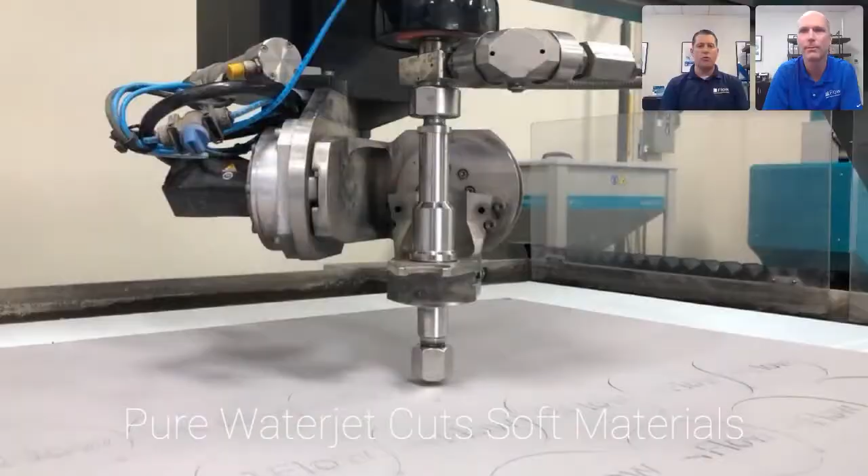We have a quick video here showcasing what's called a pure water jet - not using any additives, aggregate, or abrasive in the mixture, but just that pure water jet stream to do soft material cutting. This would be for something like foam, a gasket, or even a soft plastic.

There's a lot of good applications for pure water cutting, like Adam just said, from gaskets to foam, insulation, food - that's a very popular and great application for pure water cutting. That's very different. Yeah, very.

I even got it so you can see what they're actually cutting here - again, a very soft material. The general rule of thumb is, if you can cut it with a razor blade or a knife, you can cut it water-only with the water jet system.

Then there's the other alternative, using what's called abrasive in the mixture, which we'll be showcasing next on the machine. Let me advance the slide here. So Adam, you want to explain? When we entrain the abrasive, it's a whole different game.

In the early 80s, we developed what's called abrasive jet cutting. This uses garnet sand typically, taking that super high velocity of water but now entraining that garnet sand in the cutting process. This opens up the doors for a ton of other applications for water jets, getting into harder materials like metals, stone, and glass cutting - that's where you'd use that garnet sand or abrasive jet, as we often call it. We're really converting that pressure into velocity of that stream as it's traveling through.

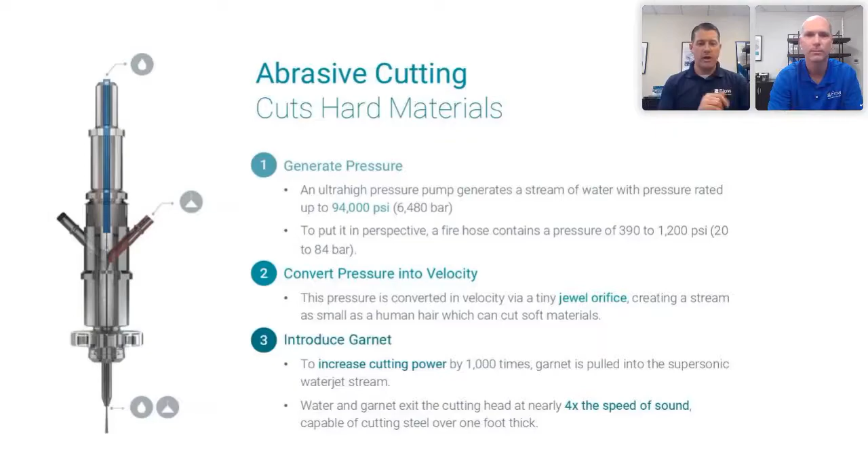As we jump ahead here, we have a quick video to showcase what an abrasive jet setup is - you'll see it cutting through some carbon fiber material here. I think this is a chassis, right Adam, that was made by Fireball? Yeah, this was coming out of carbon fiber they had used with that abrasive jet.

That moment you're seeing on the screen is actually the piercing process for that part through the steps. This is a chassis on a little drone that they developed with our customer over in Spokane, Washington - Fireball Tool. And I think I see a question here - that's actually a really good question.

I think we're going to get into some of that, but specifically hard materials - what's available? The answer is kind of anything with the water jet, including some of your titaniums, Inconels, and QT100 are great applications for water jets. You can see that white line coming out the bottom of that nozzle, and that's just slicing this material up - this material obviously cuts very quickly.

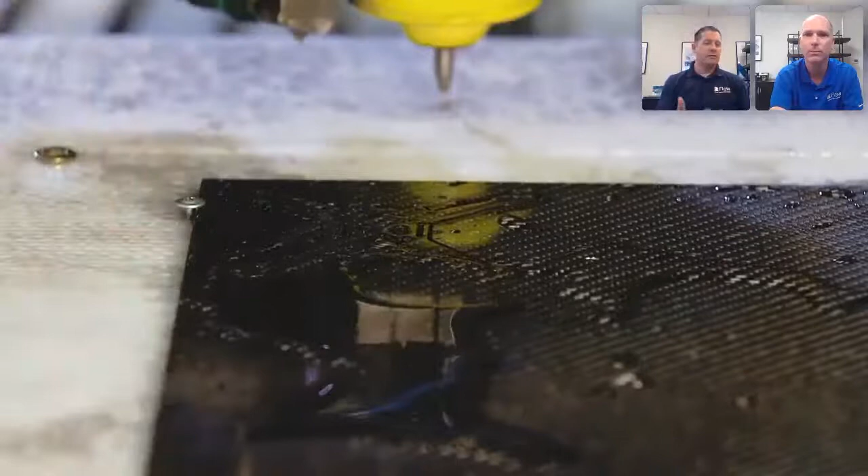As Howard just said, what's the hardest material? Like Adam said, everything will erode - it's a matter of how fast we can cut it, but you can cut any material type. We'll get into the software, but typically you're going to program out that shape right on the jet and be able to process it and come right off the system as you're seeing - no secondary processing typically.

We'll jump ahead here. Here's a good question from Jeff - is aluminum oxide the only medium that our machines will typically use for cutting? And is that typically a one-time use, or can you use it again? The short answer is that aluminum oxide, although it can be used with the water jet, is very uncommon, just because it's a very expensive material.

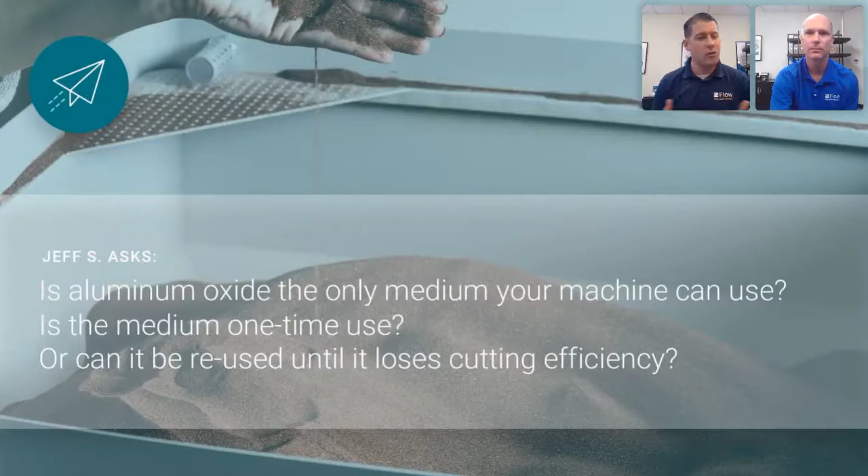It erodes the material very fast, but it costs a lot to buy. More often we see garnet sand being used as that abrasive in the cutting process, because it's a very affordable, readily available material. Regarding if it's multiple use or single use - it's typically single use, because a lot of that abrasive will be pulverized during the cutting process. There's a very minimal amount that could be recovered, so it's not generally economical to go through that process of reusing it.

I think a question for the audience is what type of materials are you guys going to be cutting? We're going to have a poll show up on your screen to get a good gauge of everybody in the audience. What are you using? What type of materials would you be cutting? Love to get the feedback from the audience. I'm looking at the results as you guys are clicking - just take a second, click on those different material types.

Somebody's clicked steel already, somebody's doing stone material, some aluminum. Just want to get a feel for what you all are doing. It looks like a little bit of everything, I guess. It's interesting - foam, rubber, and gasket, haven't seen an answer for that one yet. That's a pure water jet application. These others are all abrasive jet applications. It's kind of interesting to see the percentages here.

Finish up the poll if it's still on your screen, we'll keep going as you're doing that. This slide is basically just a picture of all these different random materials, and that's really the key to water jet - it will cut everything. So you see glass shown there, and foam and stone, composites, steel and alloys. Aluminums are obviously popular. I'd say the bulk of water jet users in the marketplace are cutting metals, but glass and composites and stone and foam are also wonderful applications for an abrasive jet.

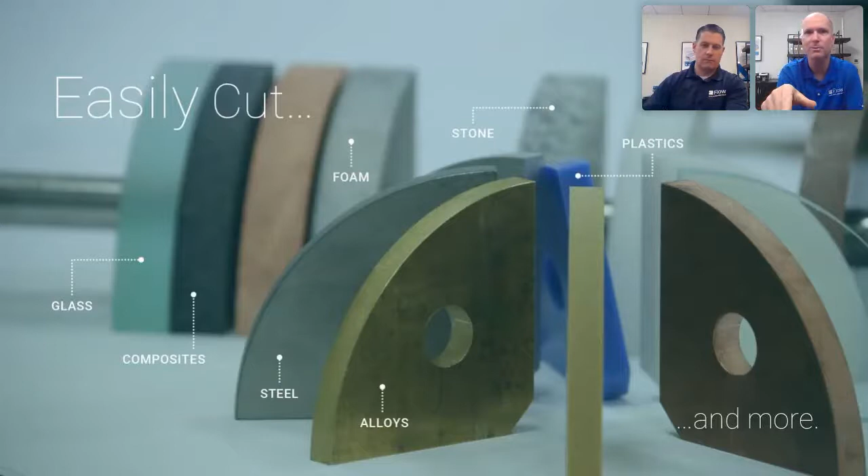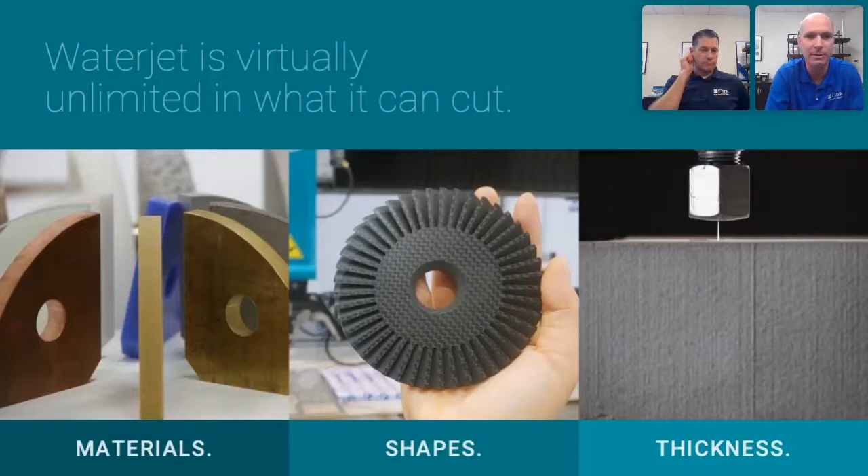A general rule of thumb, back to what Howard asked about hardest material - the harder something is to process or machine or cut traditionally, the better that application becomes for an abrasive water jet, because it's simply an erosion process. It's all speed related. In addition to versatility with different material types, you see in the middle there a very intricate shape, some sort of blade shape that was cut with 5-axis water jet. So very intricate shapes can be created with water jet. And then ultra thick materials can be cut - we'll show you a crazy picture of a 24-inch thick piece of steel later. But again, it's erosion, it's speed related. The question becomes how fast and efficiently can you cut it, not can you cut it. So that's the difference there.

Here's another question we wanted to cover for the group - keep them coming on the live chat line, because we want to jump to those too, if you guys have better or more interesting ones. But the second one we hear all the time: how does your water jet compare to a laser, to a plasma, to an EDM? So we wanted to touch on that really quickly.

We'll run through a few slides, and before we do, there should be another poll popping up on your screen. We want to know what type of equipment you guys are currently using in your shop. I'm going to take a look at the poll as you guys answer. I see CNC, laser, plasma, and obviously EDM - there's more cutting processes than we have listed there. I see a bunch of you have water jets. It's interesting, a couple EDMs. I think this is pretty representative of what we hear in interactions with our customers - most customers kind of have a little bit of everything already. That's interesting to see those poll results.

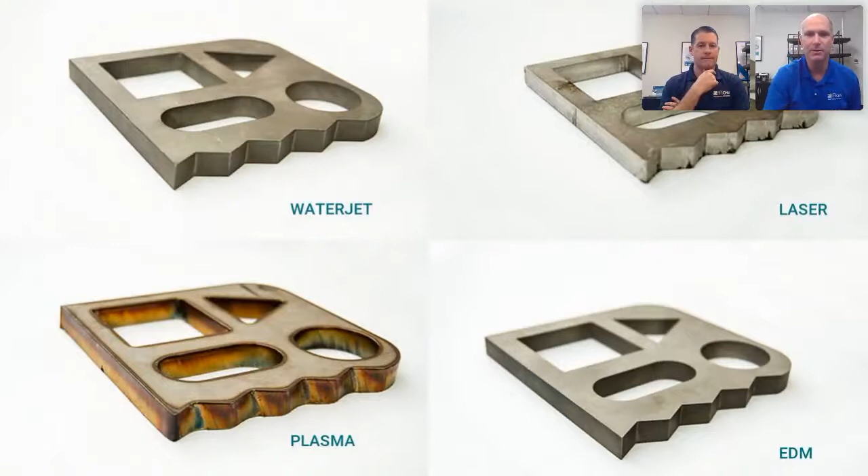Okay, so let's compare the 4 different processes. This is just a snapshot of the same shape, cut by the 4 different processes. On the top left is the water jet - we'll look at that in more detail. On the top right, you can kind of see the laser edge - just visually you see a little bit of heat affected zone there, you can see where it pierced in certain areas, so there is a heat affected area of that cut. On an EDM on the bottom right, obviously very high tolerance, high accurate wire cut part.

And then on the bottom left, you see by far the most heat affected area, and probably potentially the fastest cut here, but maybe not the most accurate cut of the four processes.

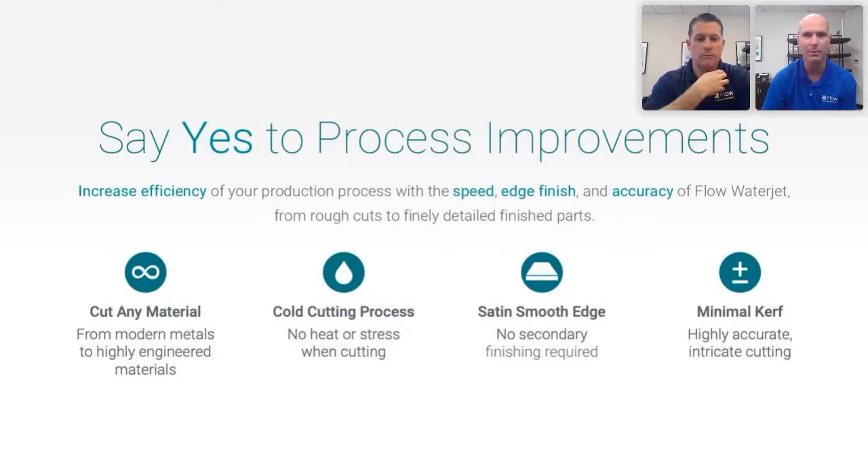So there's really four major process improvements you can experience from water jet. Cutting any material, we've talked about. It's a cold cutting process, so we're not introducing heat or stress to whatever's being cut. There's a very satin smooth edge, and it's rare that you'd need a secondary finish on the water jet cut edge. Obviously if you're going to machine a feature or bend the part, that's different, but I'm talking about the actual finished edge quality. And then there's minimal kerf, which allows you to cut very intricate parts, but it can also greatly reduce material cost if you're cutting expensive alloys or composite materials where you want to maximize sheet utilization.

So here's the quick close-up of the water jet part. Adam, you want to take them through?

Yeah, absolutely. This is a really cool picture for a lot of our customers. It's just a zoomed-in photo of a stainless steel part cut on one of our water jets. As Brian mentioned, we're not imparting any heat because it's really just an erosion process, so you don't get those heat affected zones or hardening of the edge.

As a result, we generally get a really smooth finish, which ranges from an 80 to 125 RA finish. You can dictate that, go to a faster edge quality with our parts and our software, but typically you see a very smooth finish on a part.

And as Brian alluded to, for most operations you typically don't need some sort of cleanup or secondary operation, where you get a finished part coming right off the water jet that you could use in your fabrication purpose.

Real quick, Adam. Phil, another good question there - appreciate you chiming in, keep those questions coming. But can you cut hard and soft materials on the same water jet? It's a really good question.

Yeah, and the answer is absolutely yes. There's some things you've got to do to protect the surface of the materials or the bottom of the materials, depending on exactly what you're cutting, or to keep things as dry as possible. But the answer is absolutely yes, you can cut abrasive jet and water jet on the same machines often.

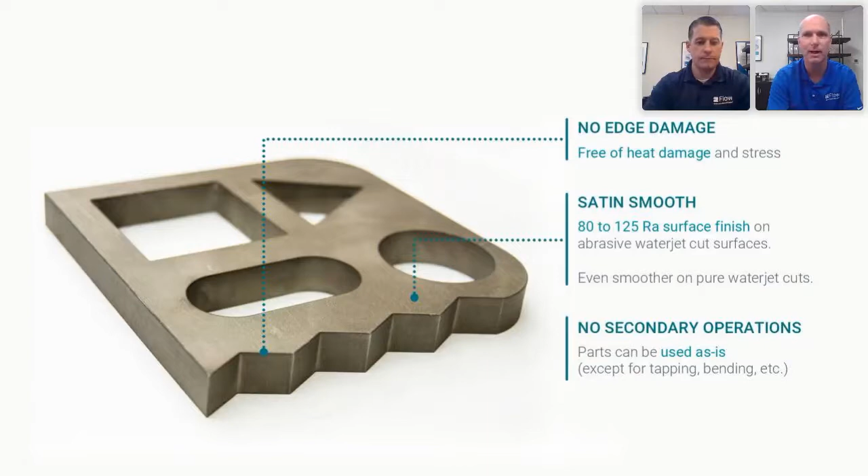And one thing along those lines, maybe to Phil's question - going from even a hard material where you have an abrasive jet, like if you're cutting mild steel, and then jumping to an aluminum or even a carbon fiber, is there any tooling changing that's required for that?

With our setup for our water jets, all you need to do is simply select in our software what the material type and thickness is. So you don't have to change the flow rates of garnet, the pressure of the jet or the pump - that's all controlled right at our operator station.

So to summarize this question about comparing waterjet to these other processes, we typically think of those other processes as complementary. Honestly, they're really not a competitive process as much as a complementary process. Like Adam said, some of the most efficient shops we've ever seen obviously have multiple processes that are really good at individual things. The cool thing about a waterjet is it's kind of good at all of them. It can be a very good entry into a lot of other markets to help you explore other business opportunities. And then maybe you get some crazy high volumes and one of those other processes helps you be as efficient as possible - if that makes sense.

One thing to highlight with the waterjet though - I think one of the big benefits for a lot of people in the fabrication world is, although there are some great technologies with lasers, EDMs, and high-def plasmas, those are very focused machine tools where they're very good at a select bandwidth of materials or products they might be cutting. Whereas a water jet, we're good at everything in some ways - no matter what you put underneath that cutting head, we'd be able to cut it and process your parts.

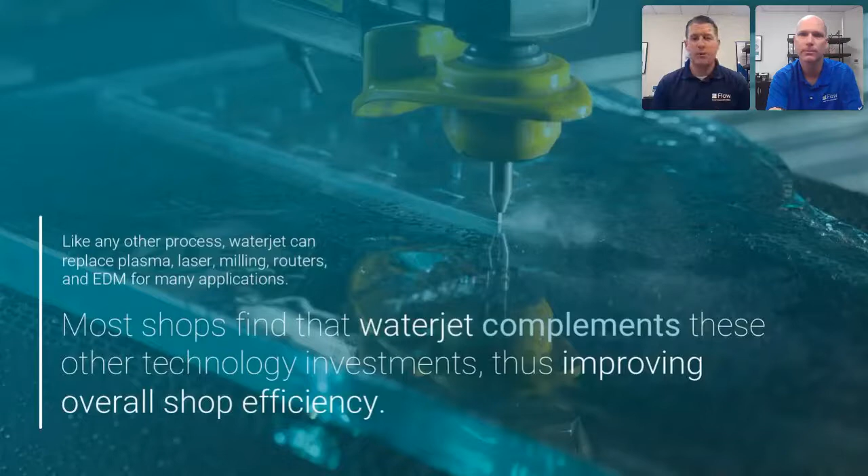Oh, here - so it sounds like somebody logged in earlier, Donald.

The question regarding stacking material.

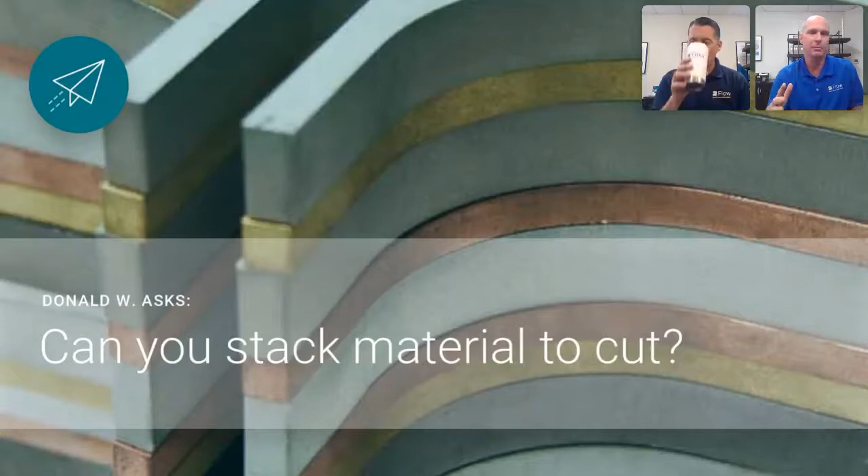This is very unique to water jet technology: yes, you can stack material with a water jet. You can not only put multiple layers of the same material, you can also put different materials and cut it all at the same time. The picture in the background shows stacking several layers thick of a material in process. You often see this in sheet metal applications where you're cutting a high volume of the same geometry out of a thin gauge material. It makes all the sense in the world to stack that up to get more efficiency out of the jet.

I'll jump in here, but the third question we heard pretty frequently is, how do I know what the right water pressure is for my business and application and what you're doing? Frankly, that's really what we're here for, to help, because there is no magic solution. We do build a variety of different pump styles, pump pressures, and pump horsepowers to really dictate what the right fit might be for your budget, your application, and your production needs.

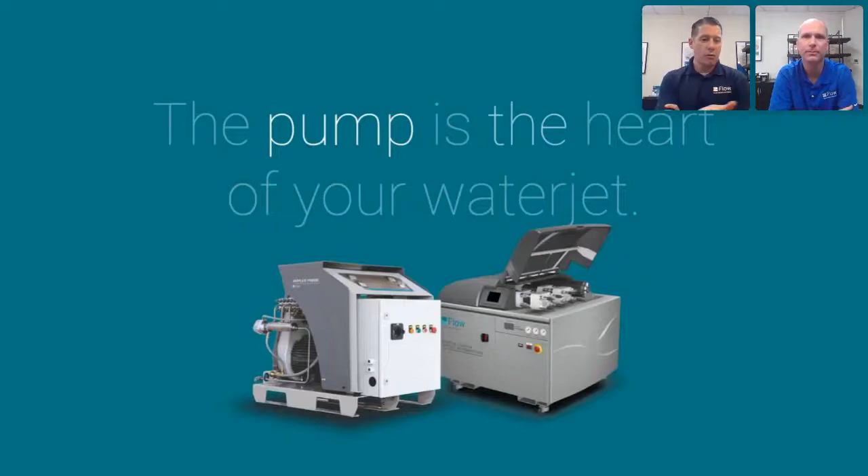But it goes to the core that the pump is really just that, the heart of a water jet system. It's what's creating that high pressure water, creating that velocity of the stream, really done right at the pump technology, which is shown here with a couple of the different pump models you might see.

What you often hear in the water jet industry, in the water jet world, is that there's two distinct ways to create that high pressure water. There's what's called direct drive or rotary style of a pump, and then there's what's called an intensifier style pump. Both will produce high pressure water, and both are great for the water jet world. It's just a matter of each customer's needs and applications dictating where you might fall within there.

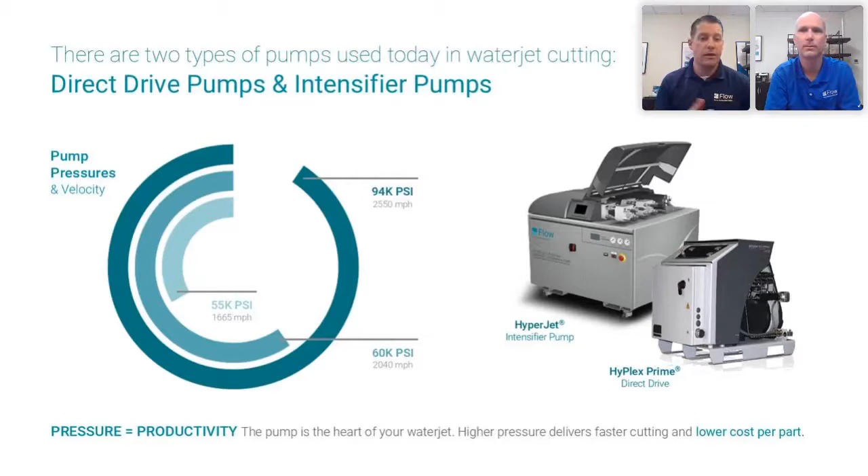As we jump to showcasing a little bit of a spectrum of our entire line of different pumps that are available, these can be equipped with multiple different machines and platforms. You have the HyPlex Prime, which is in that 55,000 to 60,000 PSI range. Then you have the industry standard, what's been around for a long time, called the 60K Intensifier Pump. This will produce 60,000 PSI water right at the cutting head.

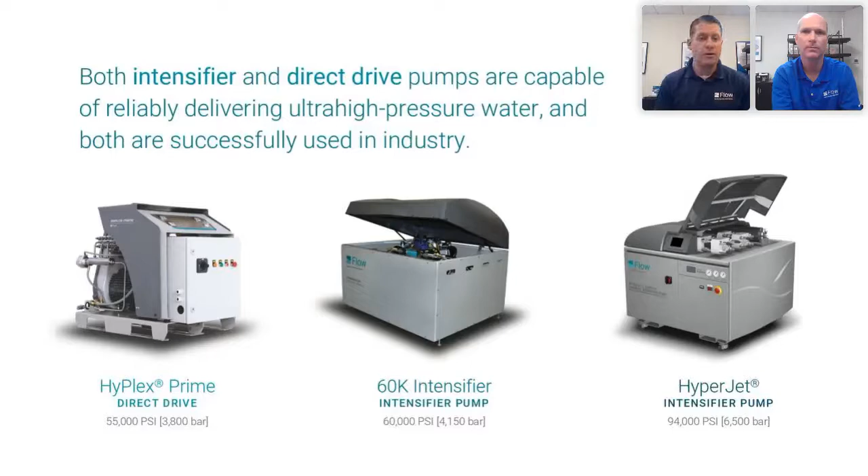The next evolution to that was what's called Hyperjet technology. This delivers up to 94,000 PSI of pressure at the cutting head using that Hyperjet technology. We'll jump specifically into a few of these to showcase how these pumps actually work and create that high pressure water.

I'll jump in here, Adam, if you want. Adam is talking about direct drive and intensifier, two very different mechanical systems that will produce high pressure water. We want to get into the details of that. Let's start with the direct drive.

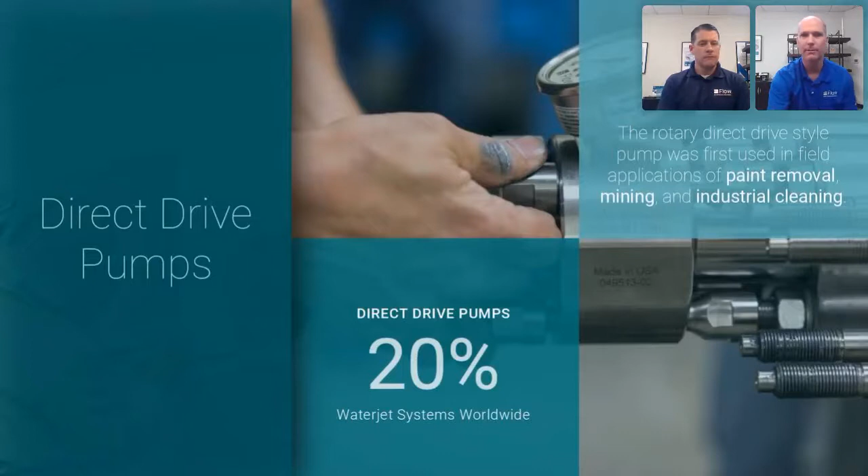A direct drive pump, and you're going to see the mechanics of this, is a rotary style pump. It uses a crankshaft to push three pistons through three cylinders, and you'll see that video in a second. It makes up about 20% of the total global market share of water jet users. The direct drive technology was originally invented because it actually outputs a lot of volume of water per horsepower of motor, and it's really good for surface preparation, paint removal, mining, and industrial cleaning. We use that today a lot in those applications.

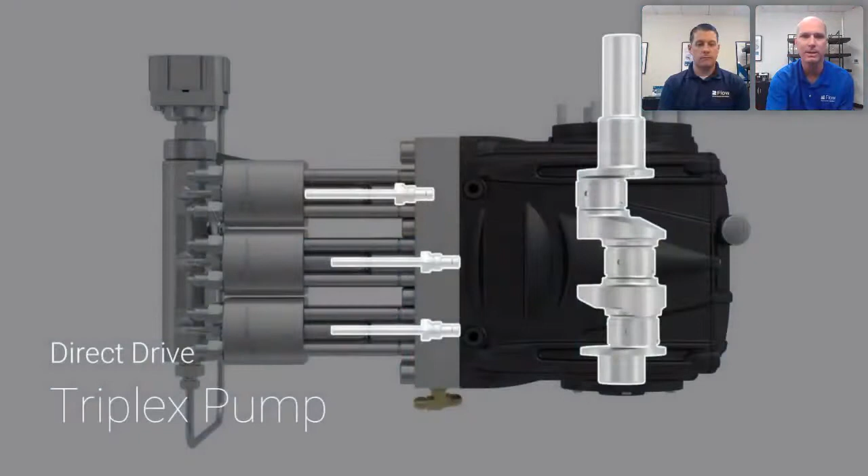Let's look at the details of it. Here's a good visual from a top-down view of this direct drive, also known as a triplex, because there are three cylinders. You see the cam on the right-hand side, which is going to push those three little ceramic pistons. There's a video of this right here, so let's let this video play.

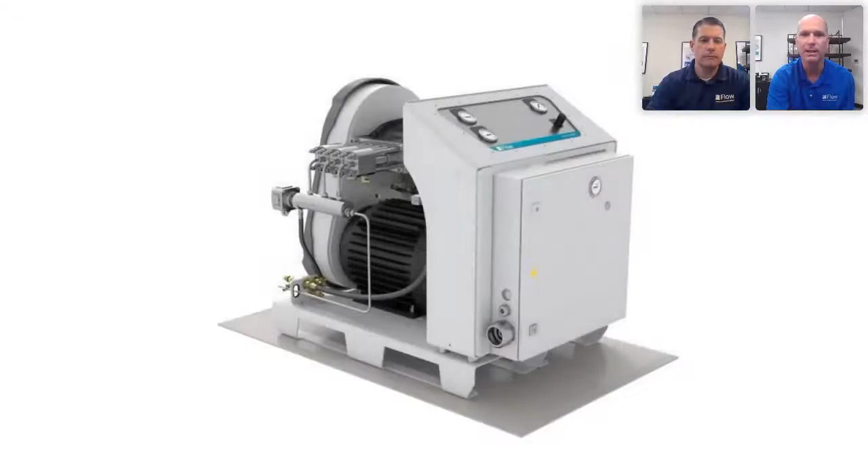Pretty cool rendering for you guys to see a cutaway of what this really looks like internally at the pump. You'll see that cam rotating.

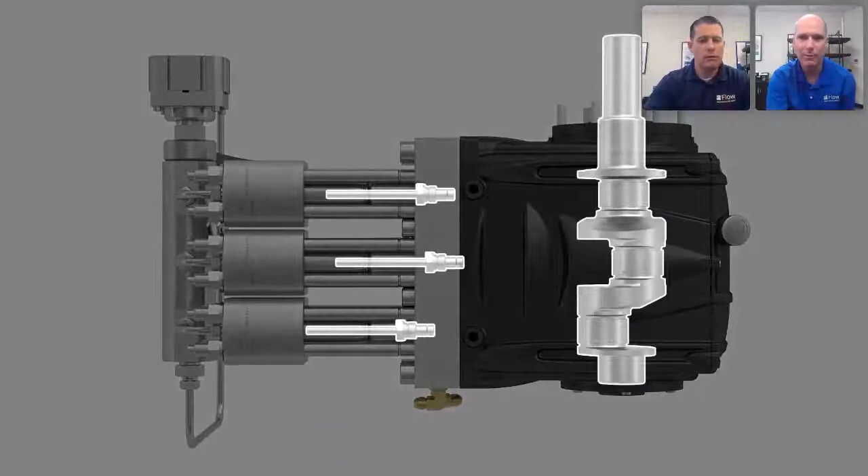Now this is obviously in slow motion here. This is usually 800 to 1500 RPMs, kind of depending on different variables, but that's pushing high pressure water out, and then on the backstroke, it's pulling low pressure water in. There's the check valve there, kind of a close up view of that.

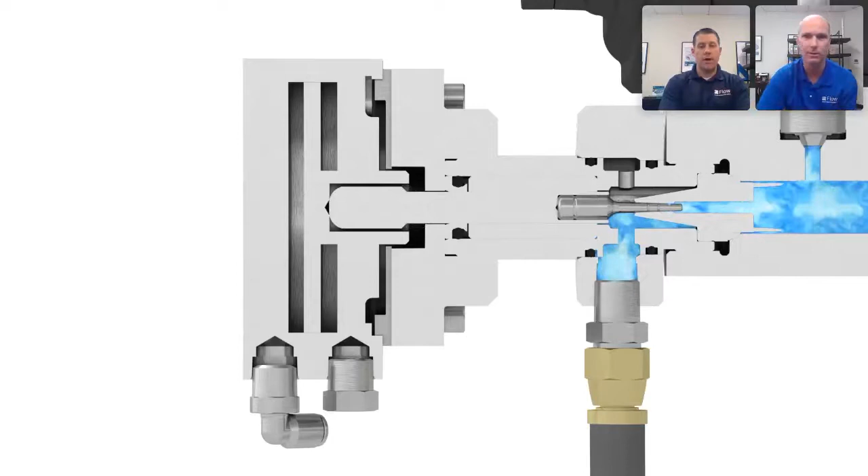Really cool pump. This is a pressure control valve system that'll allow any water that's not going to the cutting head to bypass automatically. And again, where that name comes from, it's a directly coupled electric motor to the cam or the crankshaft on there, so you get that very energy efficient design of a machine.

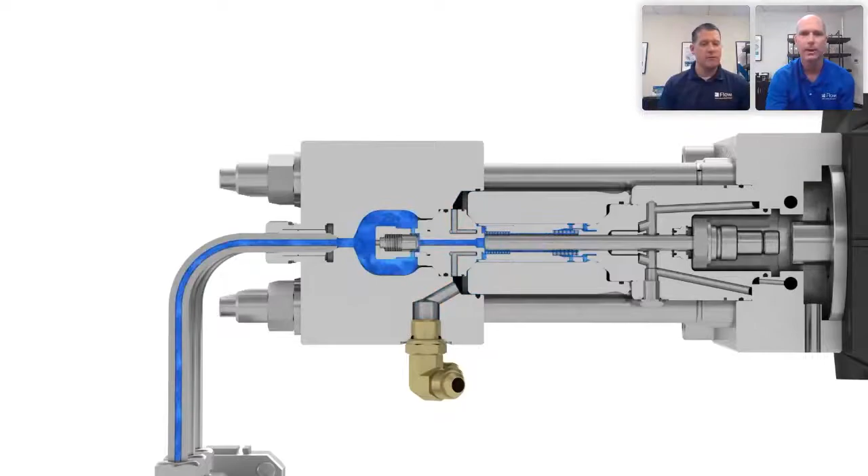And we can even jump to some of the main benefits that the technology offers. This thing is still looping here. We'll summarize this for you.

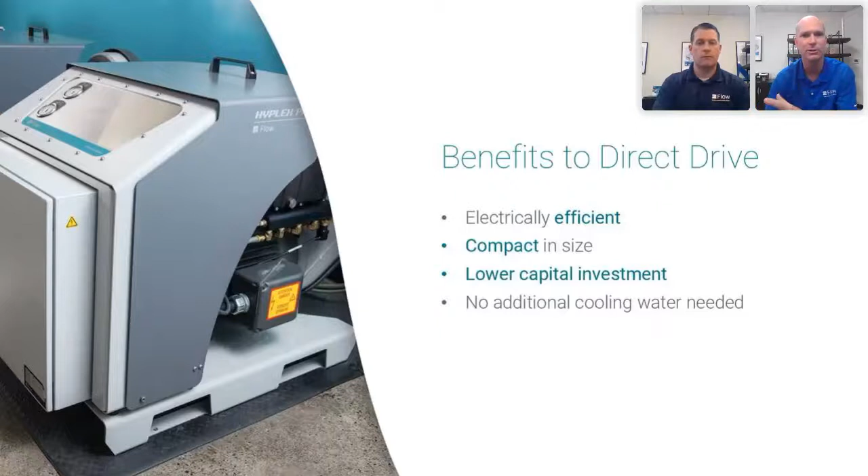So the benefits of a direct drive: they're extremely electrically efficient, I alluded to that earlier, where they output a lot of volume of water for the horsepower of the motor itself, so that's a benefit in some instances. Compact in size, so if your size constraint is an issue, that's a benefit. Lower capital investment for sure versus the intensifier, which we're going to look at next. And then we make our direct drive with no additional cooling water needed. That's all part of a closed loop unit inside the HyPlex itself.

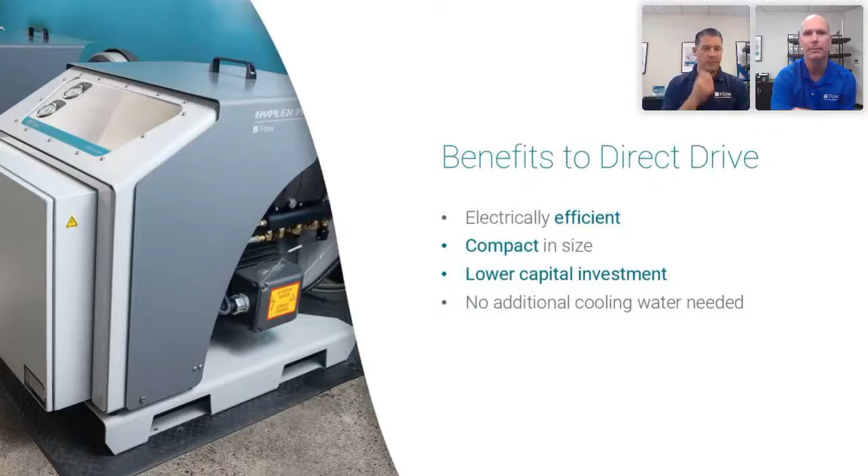Yeah, very energy efficient, and this is just that pump technology that everybody kind of sees up close, what that frame looks like. It does have a cover package on it, but this HyPlex Prime is what we call our direct drive. Typically well suited for our machines, which would be like our Mach 100 and 200 systems. Very cost effective, great technology, kind of an ideal fit for those type of machines.

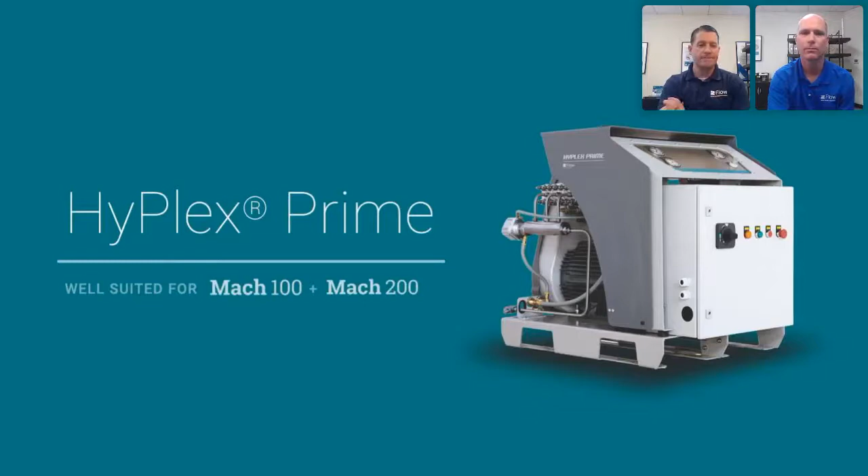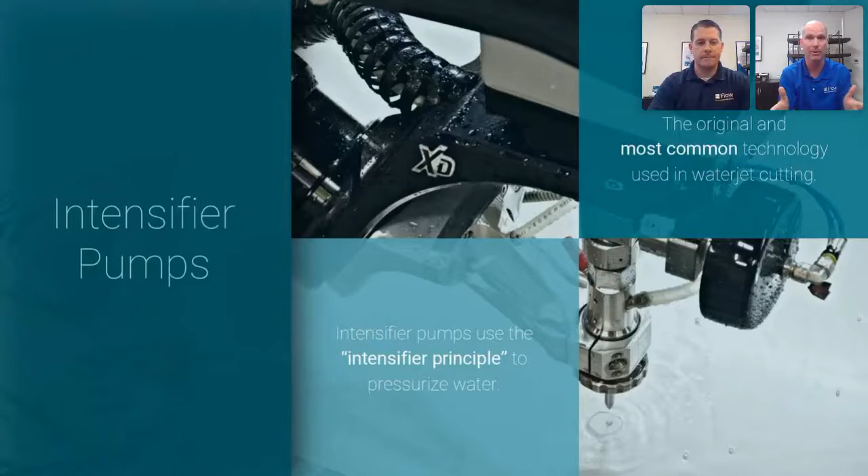So let's now shift gears over to the intensifier style pump. Adam can walk you through this a little bit, but I'll tell you, this is the most common technology. It's been around for a long time, and it's an intensification principle. So you're going to see a hydraulic system instead of a rotary system, a linear pump versus a rotary style pump. Let's take a look at it.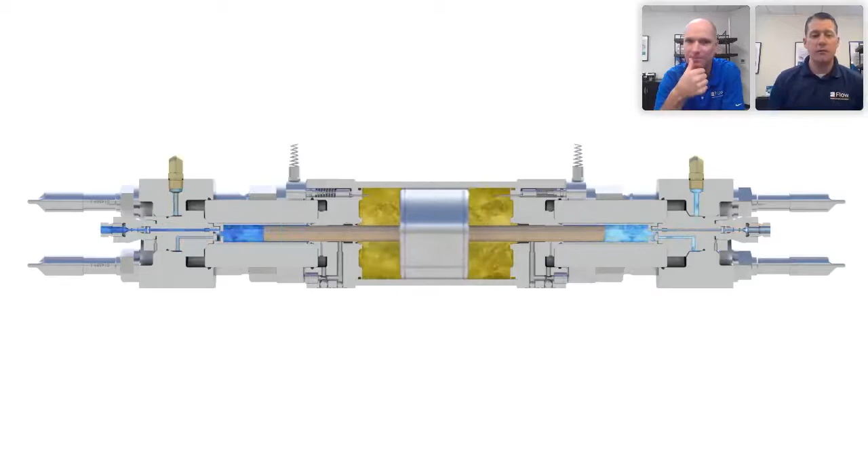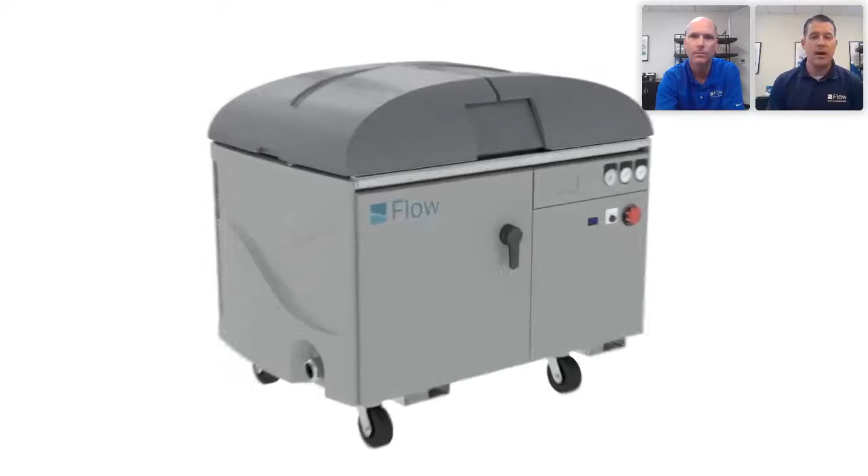Yeah, and this does the same thing, this little snapshot video of that pump framework. As we go back here, this will show the top end assembly, which is what we call the intensifier unit. Below that framework is where the hydraulic motor will sit. But as you see on your screen, you'll be able to see that cutaway of that intensifier unit, so that orange or yellow area is representing where the hydraulic oil would be. Inside of there, that large biscuit is attached to two ceramic plungers that are simply stroking back and forth across there. On our 60K pump, there would be a 20-to-1 surface ratio difference between that inside biscuit to the outside plungers. As those are stroking back and forth, that's what's allowing us to create that 60,000 PSI water right out to the cutting head.

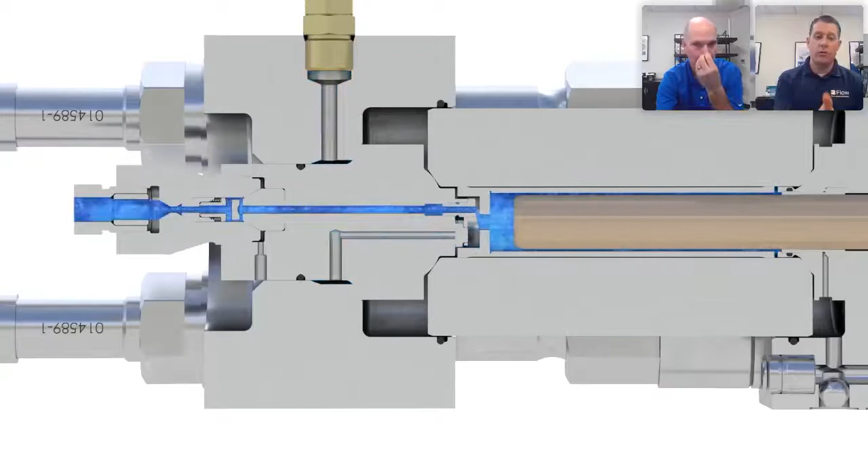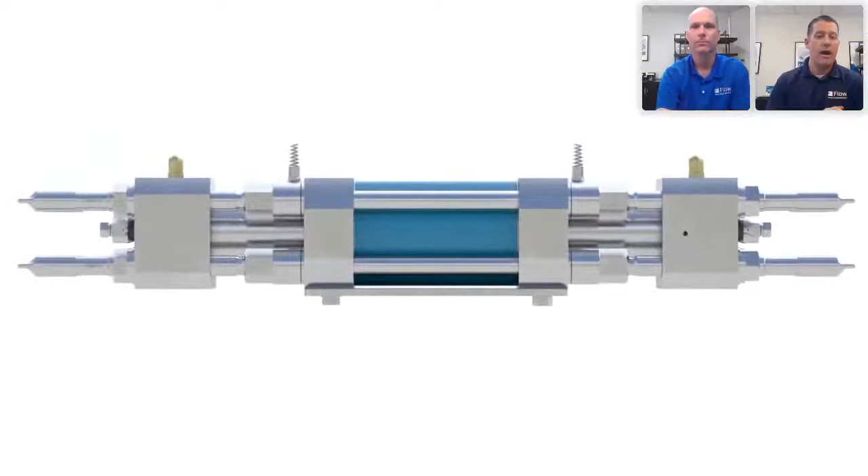And then with the Hyperjet technology, it works fundamentally the same way. That ratio does change to a higher ratio, so we get a higher pressure of water produced by the pump technology. And then as that water travels out through the end of those check valves, it'll go out to what's called an attenuator, which is a pressure collection device. That will deliver that high pressure water right to the cutting head at a consistent amount and consistent speed. So two totally different mechanical structures that both produce 60,000 to 94,000 pounds of water pressure.

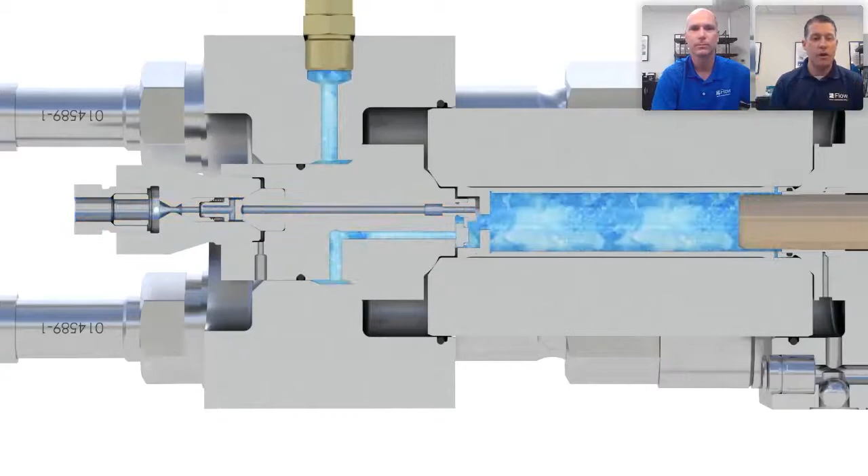One thing to point out, I know on the videos it's kind of hard to see, but the stroke rate on those pumps with the intensifier is going to be about 60 to 70 strokes per minute, whereas with the direct drive style design of a pump, that's going to range from about 1,000 to 1,200 RPM. So there is a fairly significant difference in the stroke rate of our two different pumps.

So in summary, the intensifier has its own benefits. The maintenance intervals are oftentimes longer in between seal changes on the intensifier than the direct drive. It's better suited to applications with a lot of on-off cycles, so that's kind of a particular nuance of an intensifier that is definitely a benefit. It's faster, a little simpler to rebuild those seals in there.

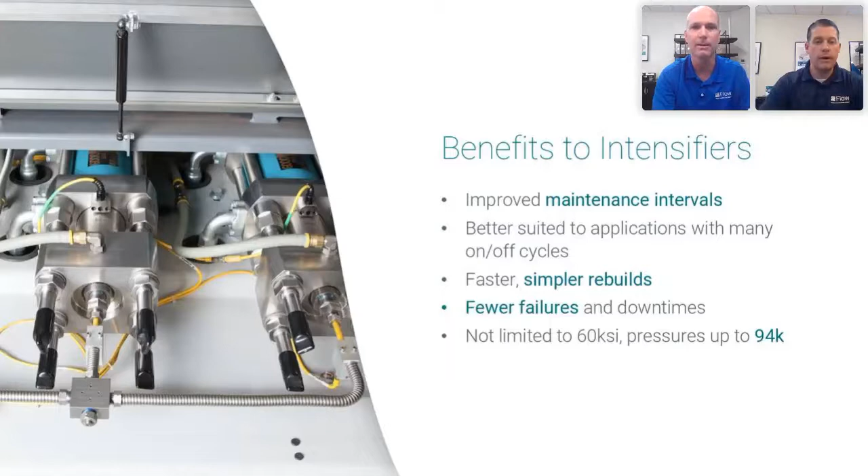There's less moving parts, fewer failures and downtime. And then it's not limited to the 60K pressure point, which is still totally applicable for certain things, but the intensifier will go to 94K. Yeah, so each one has its place, and we'll talk a little bit more about this.

I think Howard had chimed in there about which pump is better if they both do the same thing - a really good question. I don't think it's necessarily a black or white question, because there's good pumps for each individual application and customer. It depends on your cutting needs in terms of how much you're going to run that machine, but budgets do come into play as well as you're trying to discern what might be the best fit for your specific shop.

And then as you kind of see on the screen here, that's the Hyperjet. That's a picture of what that framework looks like. That is a fully mobile unit, mounted on wheels. This is typically well paired or well suited for our Mach 300, 500, even our Mach 700 machines.

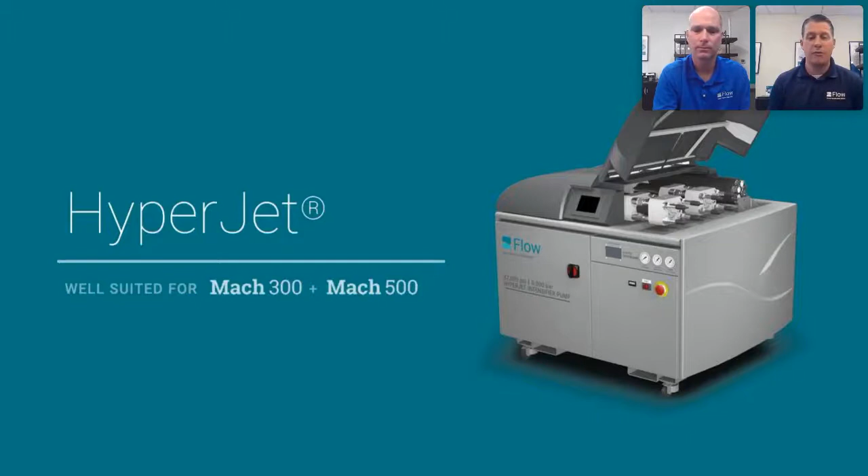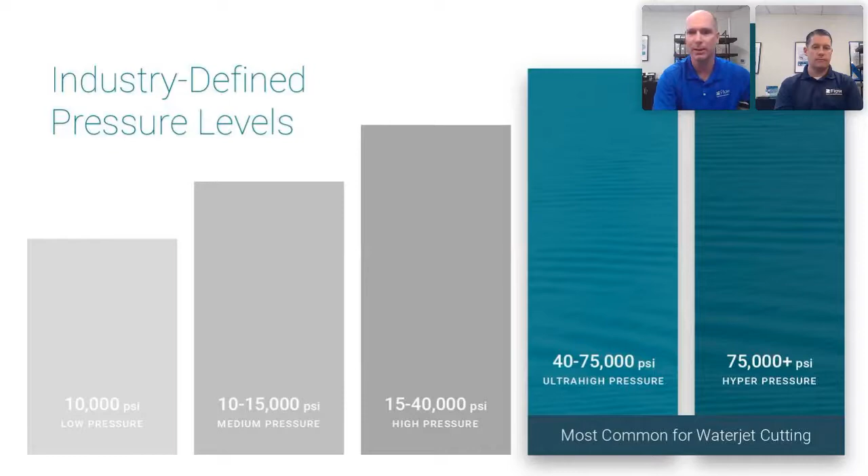So now let's talk about the actual effects of pressure. I know this is a big question because the pump is the heart of the whole unit, but we started with direct drive and intensifiers, looked at the mechanics of it. Now specifically the pressure - Howard, your question about which pump is better if they do the same thing. Well, they don't necessarily do the same thing, because the intensifier will go to that hyper pressure of 94K. This is kind of the industry-defined pressure levels. We focus on 60,000 PSI plus in the cutting environment of the waterjet world.

So what does hyper pressure do? Frankly, the same thing is true when you go from 40,000 to 60,000 as it is from when you go from 60,000 to 90,000 PSI. Higher pressure produces more productivity - faster cutting while using less abrasive particles in the cutting stream, which leads to a lower cost per part. Those are really the benefits, the physics of higher pressure. As we raise the pressure, the jet becomes more coherent and more efficient, and a lower cost per part can be achieved. That's the benefit of that higher pressure.

I think we've got a really cool video that we had taken at our facility of just running that same part with an identical setup - in terms of edge quality, same thickness, same geometry of the part - just simply running at a different pressure. So we ran one at the industry standard of 60K, and then the other at our 94,000 or 90K pressure, just to see what that looks like in terms of cycle time improvements with the higher pressure.

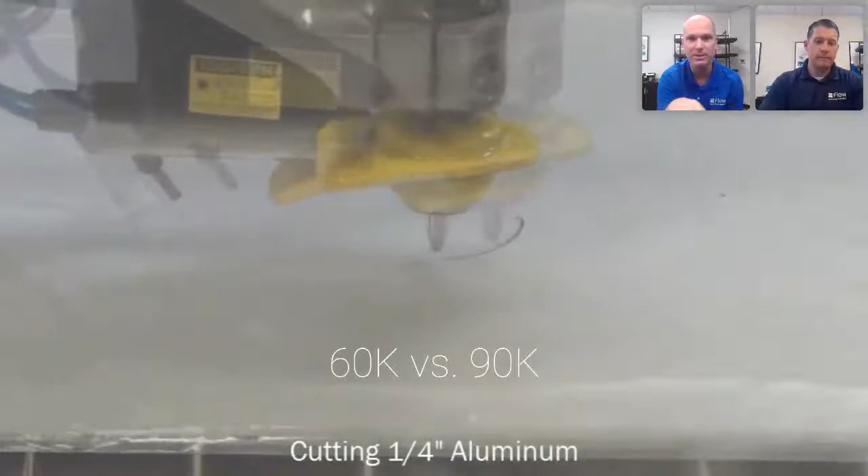And keep in mind, this is irrelevant of what pump created that pressure - it's just comparing 60K versus 90K pressure. It doesn't matter if a direct drive or intensifier created it. It's the effect of pressure on cut speed. And don't forget, the 90K system that won the race there used a lot less abrasive, and it cut it faster. So there's a multitude of benefits to cutting at higher pressure.

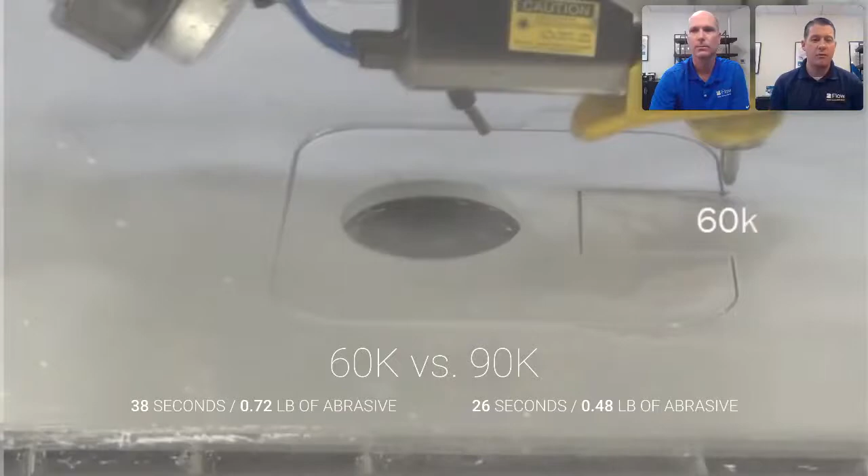That's a really good point, because specifically for as simple as this kind of geometry here that we're cutting for this part, it was I think a little less than half a pound with our 94K pump, whereas at 60K it was closer to about three-quarters of a pound. Depending on how much you're going to cut with the water jet, if you're able to reduce your abrasive by that 20 to 30% reduction, that can represent a fairly significant savings in terms of your overall operational cost of the water jet, and how many parts can be produced in an hour at your shop.

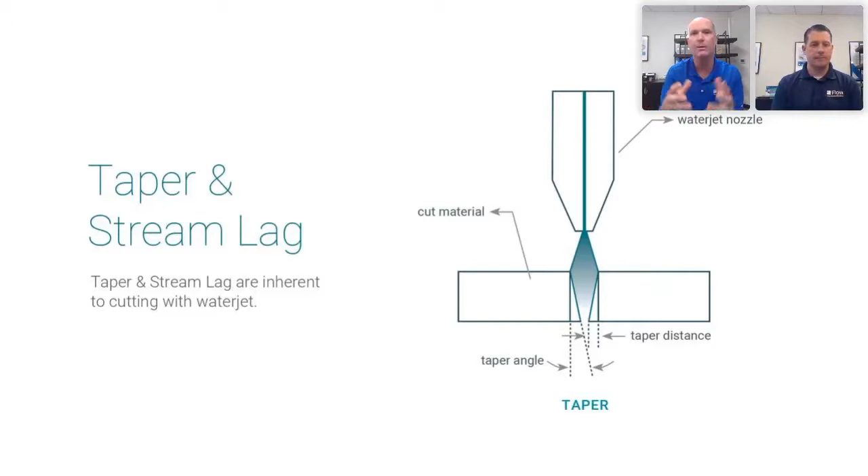Two specific things that need to be dealt with are taper and stream lag. The visual on the right shows this diamond-shaped colored center section - that's showing the taper. As the jet goes through the material, it loses energy as it travels, and you can get a V-shaped taper depending on how fast you're traveling through that material. We're going to show a video of this in a second. We've got ways to handle that. One traditional way is to slow the machine down so the jet remains perfectly vertical and the cut wall you want to keep is perfectly vertical. Or we use technology and eliminate that through dynamic water jet, which we'll show you in a second.

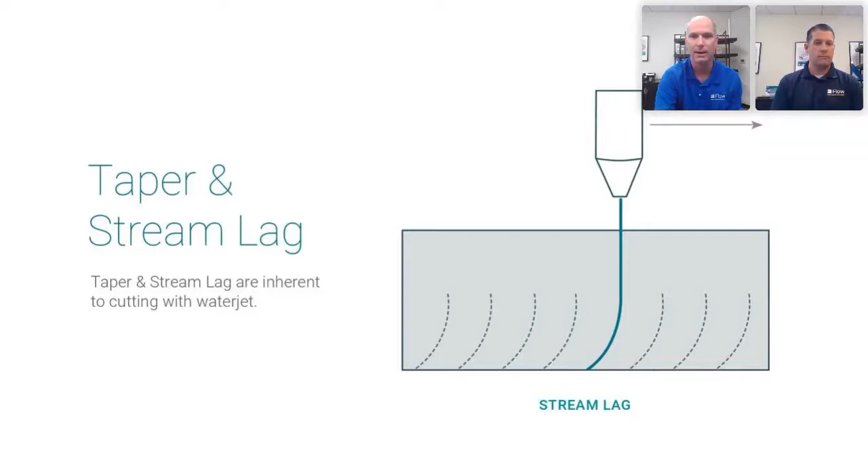The other variable that has to be accounted for is stream lag. If you look at this diagram, if you were moving left to right across your screen, where the jet exits the material at the bottom is quite a ways behind where it enters at the top. That can affect the smoothness of your cut - it has a visual effect and an accuracy effect which needs to be accounted for when you're talking about abrasive jet cutting. So here's a video, and I think this really shows it as it goes through this piece of Lexan.

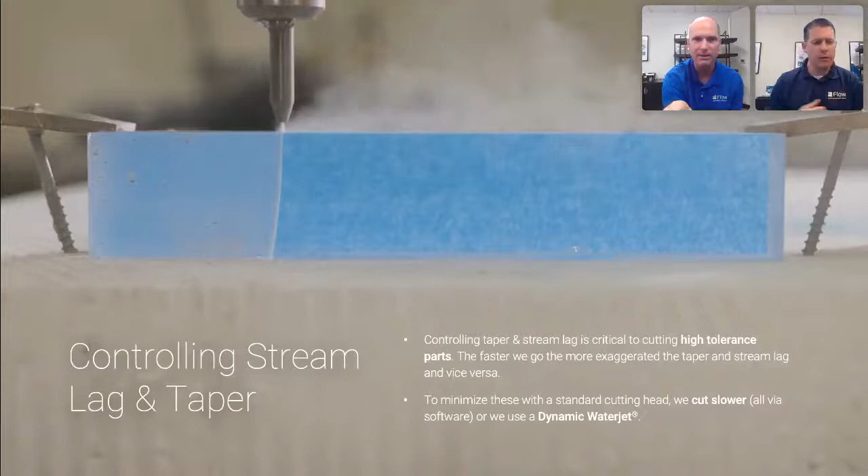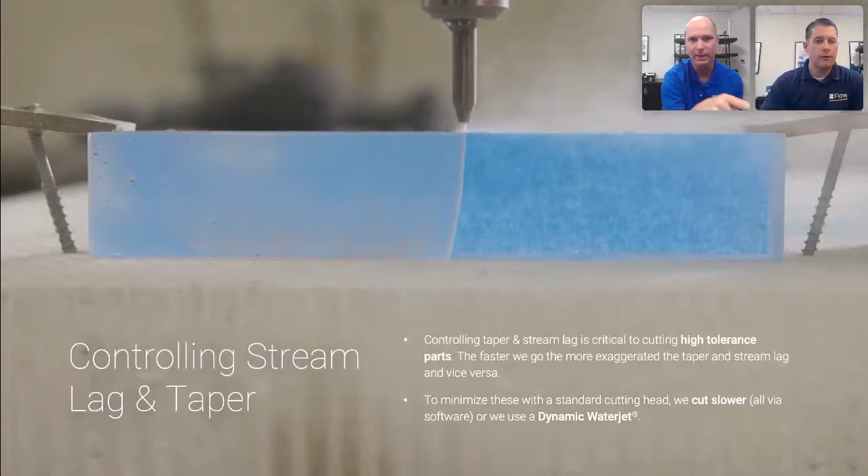Yeah, I think we were cutting 1 inch, maybe 2 inch thick Lexan. Right now it's traveling pretty slowly, so you can see where it's exiting at the bottom is just a little bit behind where it's entering at the top. However, it's going to keep picking up speed. You can see that stream lag really starting to show at the bottom there. And now it's really starting to show because we're continuing to pick up speed as we go. Again, that's something you have to account for.

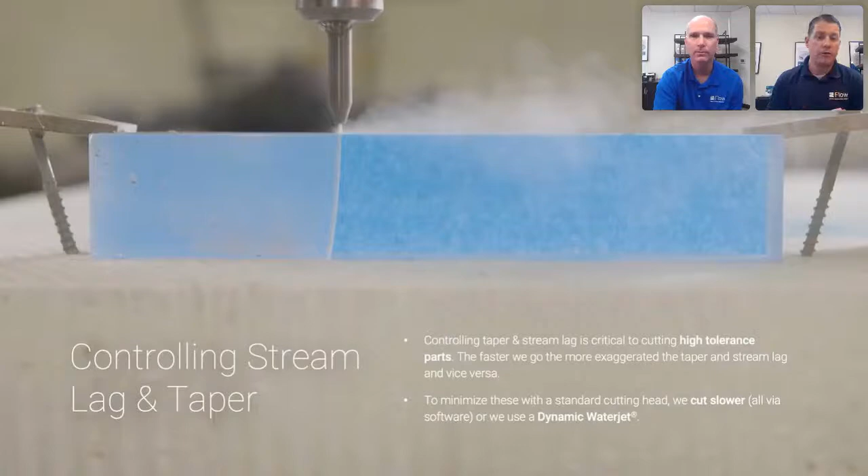Yeah, that's what Brian's highlighting - that energy loss as you're traveling through the material, that power of erosion, starts to be less and less as you go through the end of the material. Specifically, we developed - this goes back about 15 years - a technology called dynamic water jet to address this exact issue. Whereas most job shops couldn't afford to slow their cuts way down to get perfectly vertical walls, what we developed automatically adjusts to account for that known amount of taper. That known taper is developed by our modeling and software for all your different material types and thicknesses. It'll kind of dance around your part with those extra 2 motors at the cutting head. We're not essentially eliminating taper - what we're really doing is putting it all into the scrap side of the part. So your scrap side will have all of that taper, and your finished part will have a perfect vertical wall.

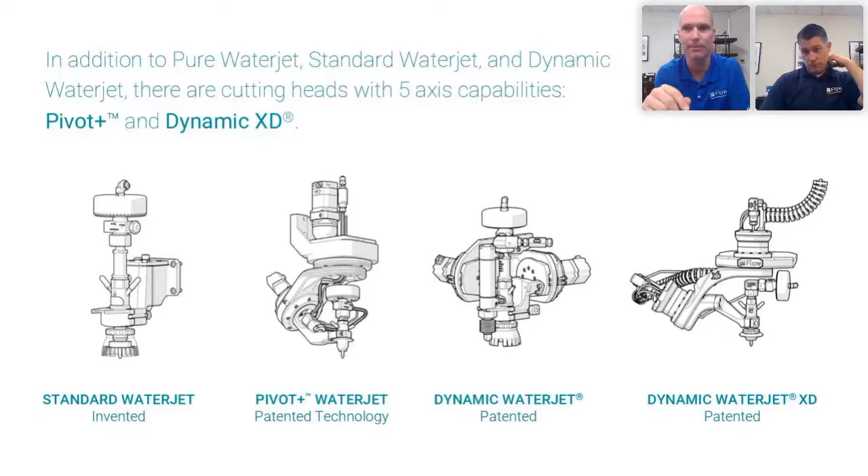Okay, what do we have here? We have another question from Danny: do you have a machine or system that's capable of holding within 1/1000th tolerance or better for cutting steel? The short answer is yes, we do. We have technology, we have equipment that can be well within that tolerance of 1/1000th.

Certainly that is on the very tight tolerance end in the water jet world. But with the proper setup and the right technology, that is achievable, with the caveat that it depends on what material and how thick you're cutting. Sometimes if you're doing 1/4 inch versus 12-inch steel, those tolerances will change a little bit. But we also have a full applications team here at our facility in Kent, Washington, where that's really what they're here for - to help our customers in the field if you have a crazy application or something that might have a very tight tolerance like this. We can help you walk through what the proper setup would be for something like that.

I want to sidetrack for a second - a great question from Michael: what software is used for nesting parts? Our systems come with a complete software suite, and that's a big part of the machine tool itself. We build software that does the nesting for your parts, or we've got open architecture where if you have a sophisticated nesting package already in your business, we'll show you how to import those into the Flowmaster suite and use them on the machine tool. So you can either come with it if you don't have it, or use an existing piece. The software is a key factor in this whole thing.

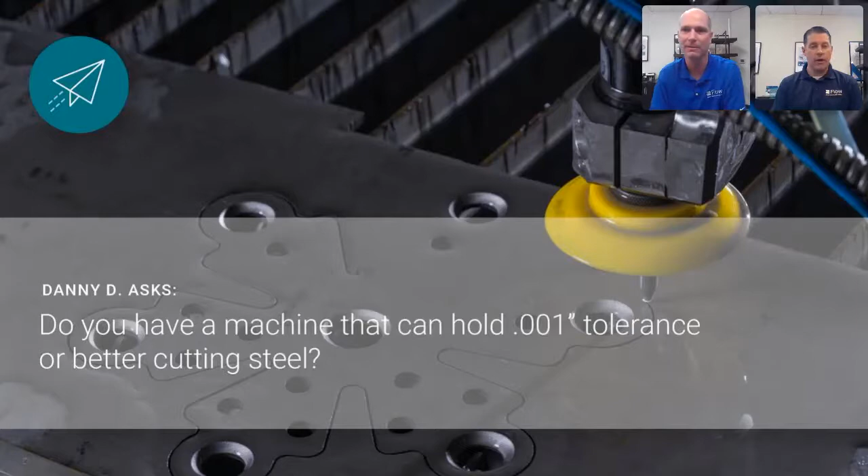I would agree with you. I think, as we look at what we call a water jet system, that's broken up into a few main categories: the pump technology, the cutting heads, and the actual tables themselves.

I think the most important part of that is really the software package. That's something we have called FlowXpert, our latest evolution of that software. It's a full solid model programming software that's available, so you can integrate with other third-party software suites you might be working with, or use it as a full programming suite as well.

That's something we have the ability to send to any customers, demo seats of the software as well, so we'd be happy to put you in touch with some of our applications guys for that. Just to follow up on the offline programming part, the software suite has full CAD/CAM programming capabilities, or you can import already created CAD work.

Quick question on the screen, there's a poll that popped up here. Do you have a need to cut bevels or chamfers? Instead of just vertical 2-axis cutting, how many of you would need to do bevels and chamfers? I'd be curious if this comes out 50-50 or what it looks like. Historically, the bread and butter of what we see for our customers has been vertical cuts, but we are seeing more and more customers gravitate toward the need for 5-axis and bevels and chamfered edges.

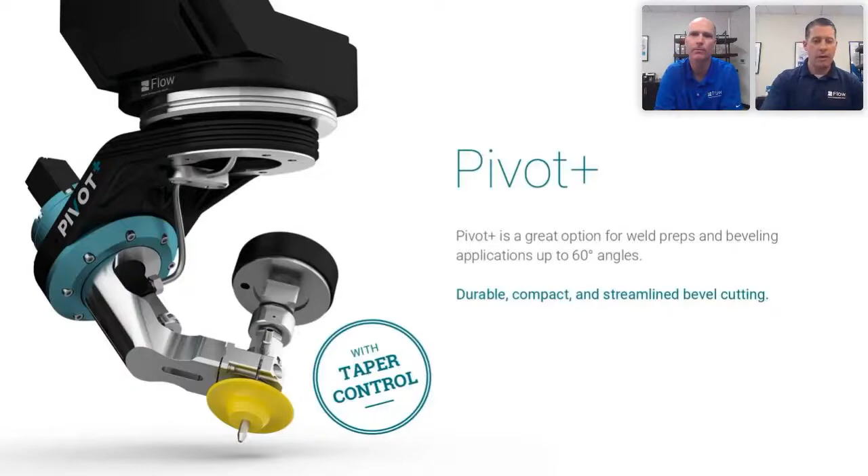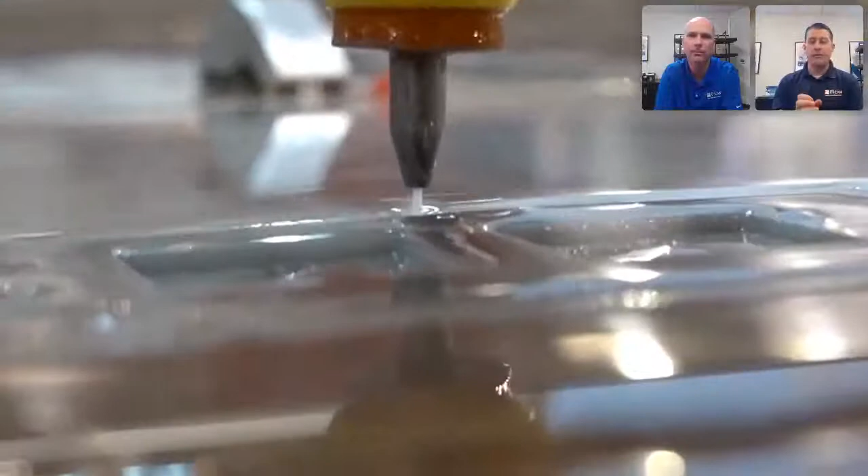Jumping to a quick video here for the group to see that Pivot Plus cutting head in action. We're seeing a lot of guys use it specifically for the stone world nowadays, especially with harder porcelain and materials like Dekton that historically are tough to do with a saw blade. Using our waterjet is a great fit for that, and this will provide those mitered edges on your finished part—you can see it dancing around this part here.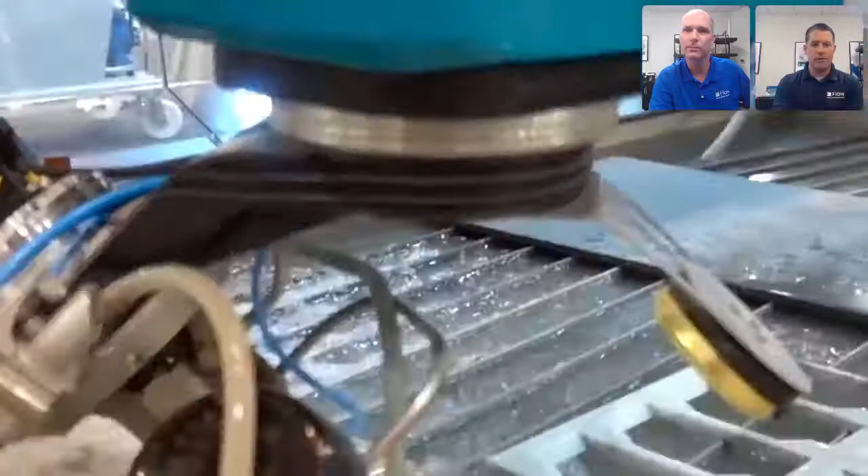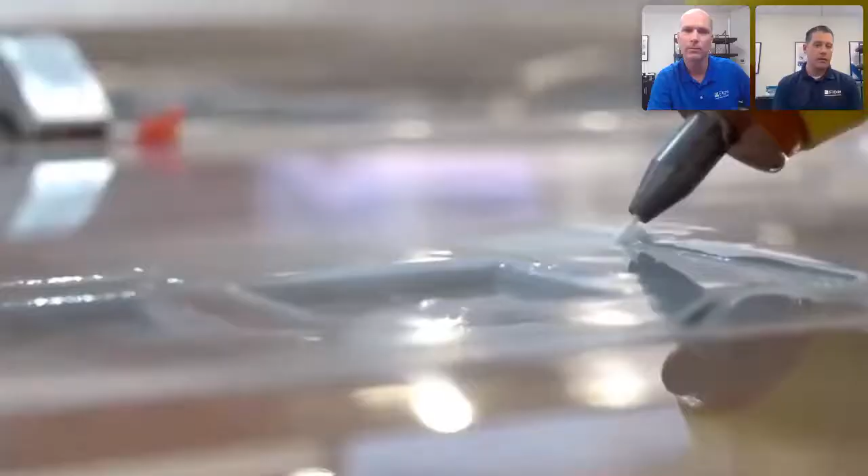There was a question about whether this is hard to program or to run the machine. Frankly, all we want your operators to know is the material and how thick it is. The machine handles all the other aspects—the movement, the compensation, the turning of the wrist—that's all done within our software. We don't want you to have to get into the minutia of machine operation. You can see here it's doing those 45-degree mitered edges on it. Do you want to jump in here, Brian?

So you might ask, why is there a Pivot Plus and a Dynamic XD? It's kind of like anything else - there are different investment levels depending on the performance you want. Our Dynamic XD is our most high-performance, state-of-the-art cutting head. It does full taper compensation, full 5-axis, up to 60 degrees of angle cutting, and it's the most accurate, most robust cutting head we build. We typically put that on our Mach 500 platform. So it's just a matter of pairing the right technology to the right platforms for the right applications and budgets.

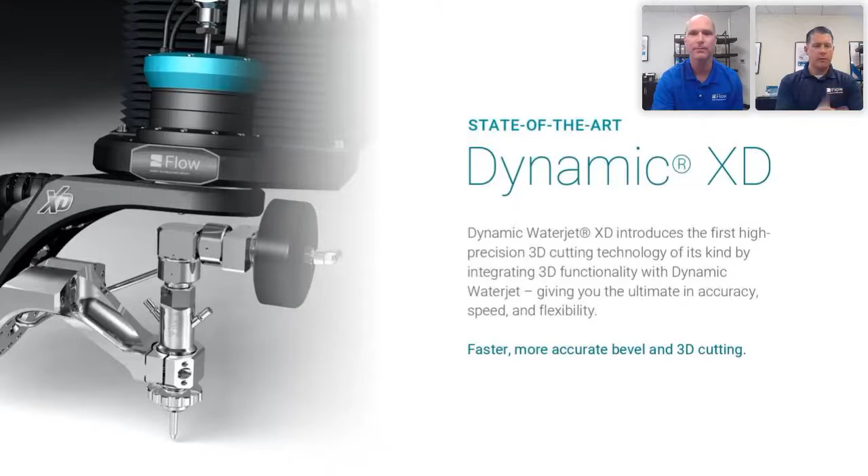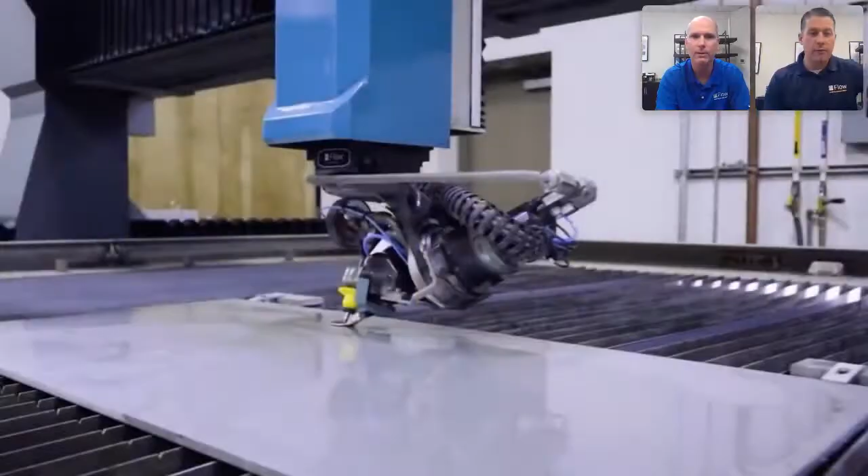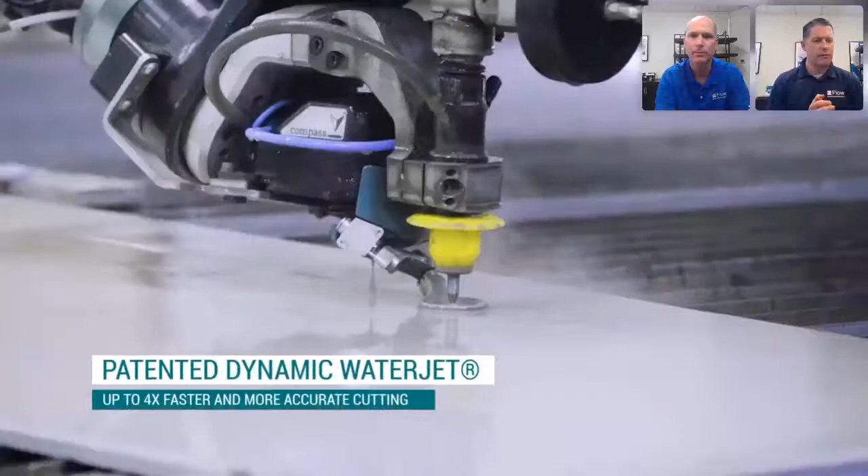We have a video here of the Dynamic XD cutting head in operation, so everybody can see what that looks like. As we zoom in, this is a bigger sheet of material - I think this was about a 3-foot by 4-foot piece. Again, you don't have much fixturing required to set that up, and that's sitting right on those slats in the catcher tank as well.

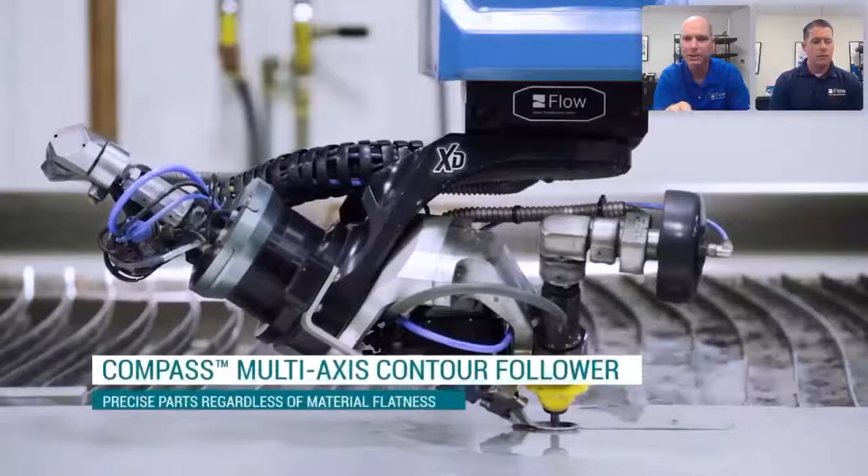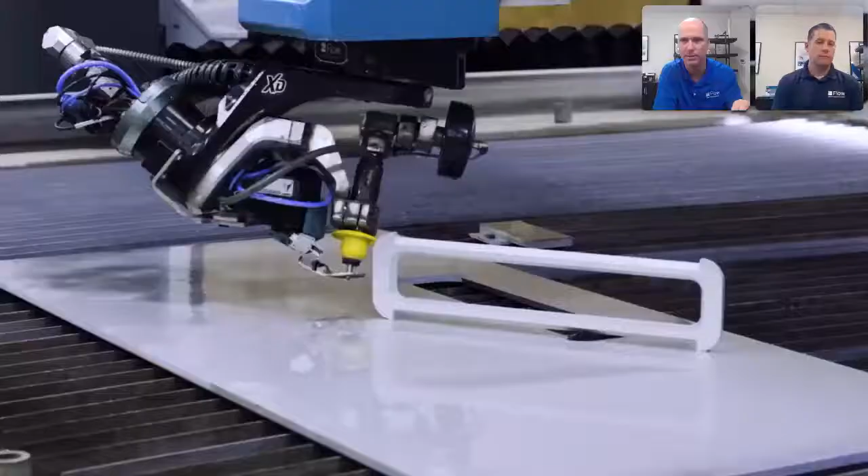What's interesting, if you watch this video, is that little ring riding on the material - it's called a compass. What that device does is monitor the height of how far the jet nozzle is from the material it's cutting. As you get into angle cutting, you can see the part there finished. Obviously, the height at which we're standing off from the material becomes really important because I'm at an angle - if I'm strictly vertical, the distance I am from the material is not as critical. But that's what that compass device is. It comes on and off - it doesn't have to be on there all the time if you don't need it, and it's not a requirement for the part you're cutting.

Some customers, what I've seen them often do, is for parts that require much more precision or accuracy, they'll pop that compass on - it's just a magnetic attachment, a great simple tool. But for other parts where you may not require it, they just pull it off their machine as well. Maybe really quick, let's sidetrack - a couple of great questions came in about how do you accurately locate at a corner of the part when not just cutting.

So I think what you're saying is you've already got the outside cut out and you want to locate features specifically inside that. The easiest way to do that, simply, is you fixture and cut yourself a little L bracket, and you mount that to the table. You clamp that to the table. Then you put your material in that lower left corner, and everything becomes zeroed off of that lower left corner in that L bracket. If that doesn't make sense, ping us and I can try to explain it better, but it's a really simple thing to do.

There's also technology that we supply that does laser location, so there's a laser edge finder that you can do some things that way as well. I've seen a lot of customers in the field do both of what Brian's talking about, but our laser edge finder will just slide right over that mixing tube, and show you the exact location of where that cutting head is.

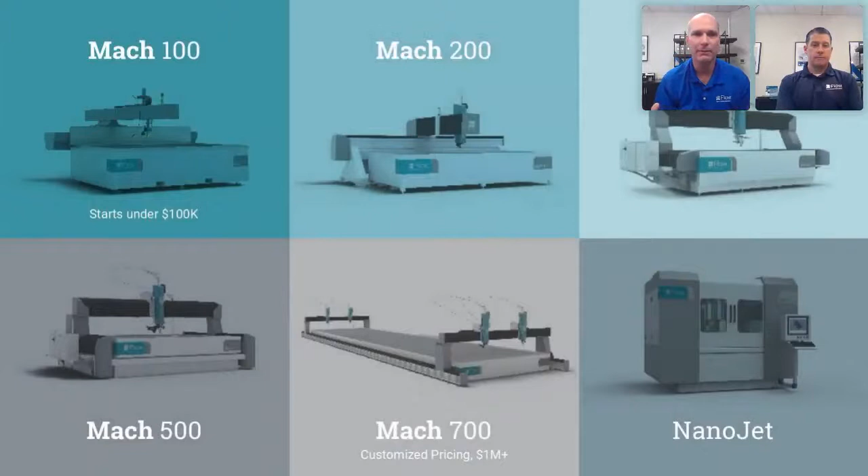Here's a quick snapshot of a variety of different platforms and machines that we build. Now we're kind of getting full circle here, so we've got the pumps, we've got all these cutting heads, here's the different platforms. It starts at under $100,000 for your basic small envelope Mach 100, and then goes all the way up to your Mach 700. You see on there customized pricing, it's $1 million plus. You can get very large, huge gantries. Multiple gantries is another factor. If you look at that picture, you'll see 2 gantries on there, each with dual heads, so that's really a 4-headed machine in really big envelopes.

Most popular platform is our Mach 500. That's kind of our flagship platform where we put all the different options on it. And then you see on the bottom right the NanoJet, the fully enclosed high accuracy machine. So huge price range, I understand, and we'll get you specifics depending on exactly what you want.

One thing to make clear to the audience is even though we build different platforms of machines, the Mach 100, 200, 300, and 500, within each of those platforms are available multiple different table sizes too. So we really want to customize each machine with the cutting head, the pump, but also the table size to best fit what your shop is going to process.

I will say in the industry, and to your question about the table size, the bed size, 6.5 foot by 13 feet, in other words 4 meters by 2 meters, is the most common size platform that you see in most water jets. That's kind of your most common size configuration. However, that Mach 700, we can build as long as you want. If you want it to be 150 feet long, that's just making the gantry rails on the tank as long as you want them on the ground. So there's really no limitation to the bed size.

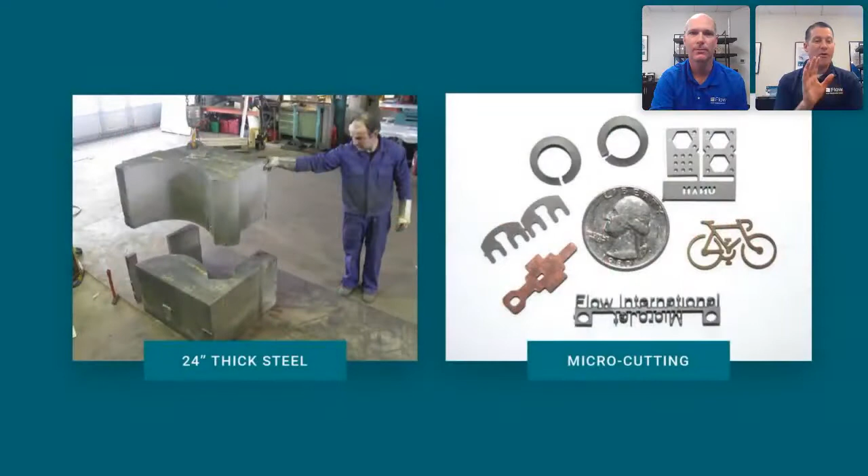One that always stood out to me was a neat application on the left side, a customer cut some real thick stainless steel on the machine - a 2 foot thick piece of steel. Certainly not the fastest cutting application in the world, but really neat to showcase the true capabilities of what a water jet can do.

Going back to the earlier question about tabbing, there's what we call micro cutting. If you're doing something very small and detailed, that same machine cutting a 24-inch thick piece of steel could then go process something as small as little bicycles, about the size of a quarter. It's neat to showcase the entire range of capabilities our water jets are designed to do.

You also see a lot of really cool food cutting applications. For example, chicken - there's a lot of chicken breasts that turn into chicken nuggets that are portioned by high pressure water jets. Tons of food applications, actually.